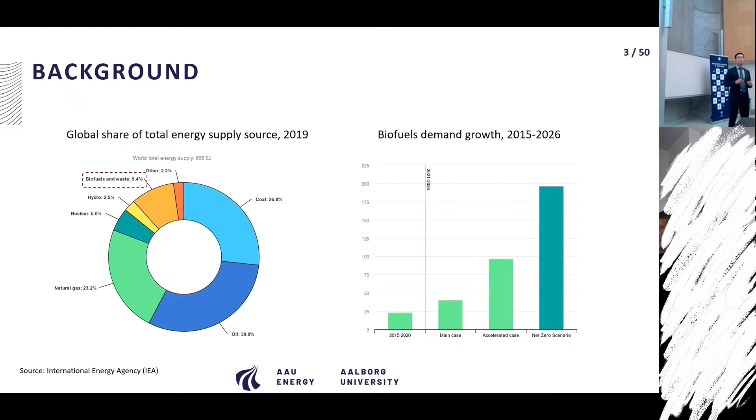From the reports of the International Energy Agency, biofuels or biomass is still the largest renewable source supply, and biofuels are very potential in the near future. So my project aims at contributing to the conversion from biomass to biofuels or bioenergy.

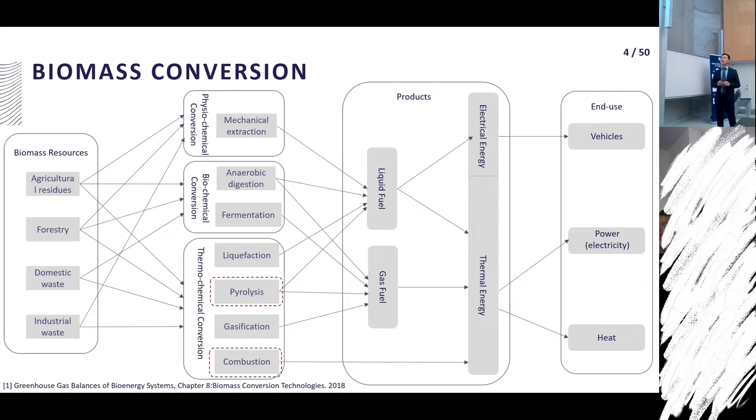From the technology point of view, biomass conversion can be roughly divided into three categories: physicochemical conversion, biochemical conversion, and thermochemical conversion. Among them, thermochemical conversion, such as pyrolysis and combustion, is usually more efficient in terms of producing biofuels and recycling energy. Moreover, pyrolysis is also a sub-process of combustion. Therefore, I intended to investigate biomass conversion via pyrolysis and combustion technologies.

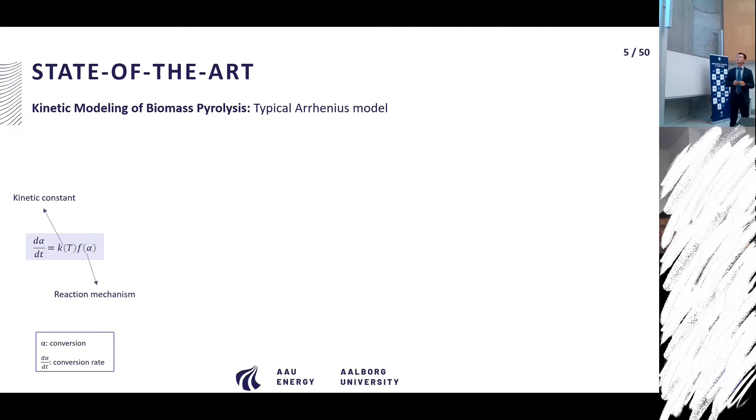For biomass pyrolysis, kinetic modeling is the fundamental basis of understanding and predicting the conversion process. The conventional models are based on the Arrhenius type equation. That is, the conversion rate, d alpha divided by dt, can be calculated by the kinetic constant K(t) times the reaction mechanism F, in which K(t) is a function of temperature governed by the kinetic parameters A and Ea.

Almost all the work in this model is derived from two sides. One is the evaluation of kinetics, and the other is the determination of the reaction mechanism. For instance, the model fitting and model free methods for the former, and the master plot for the latter. The work from the two sides also has some connections and influences each other.

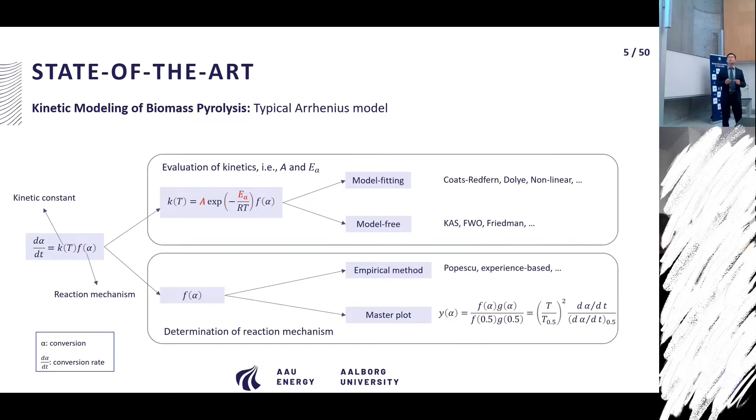In addition, the determination of the reaction mechanism, I think, is not adequate. It needs to be emphasized.

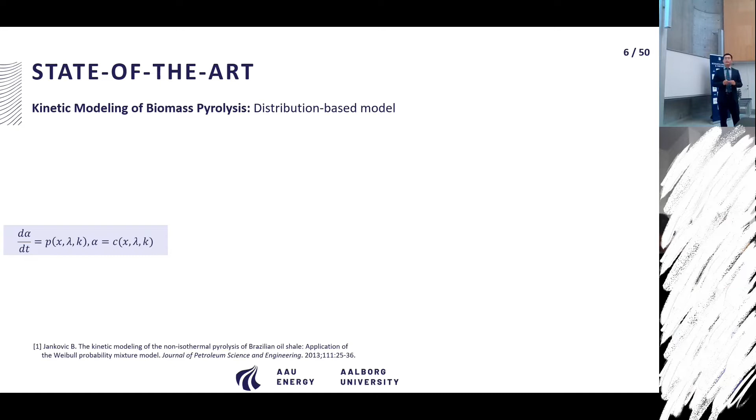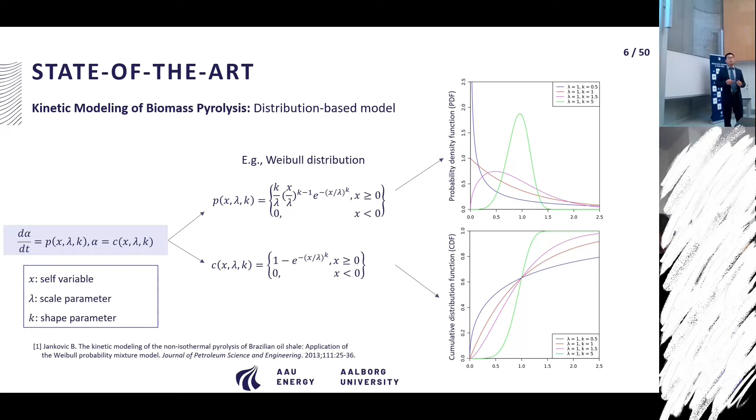Apart from the conventional model, there is a new way to describe the pyrolysis process based on some distribution functions, for instance, the Weibull distribution. From the figures, we can see the plots of the Weibull distribution, the density function and the cumulative function, are very similar to the Arrhenius equation for a certain range of lambda and k. For instance, lambda equals 1 and k equals 5 here. That shows the potential of using these distributions to predict the conversion process.

Here, I would like to talk a bit more about the conceptual ideas behind the two models. For the Arrhenius type model, it's based on collision theory, actually, and it's an analytical physics method. The reaction occurs due to the effective collision of the molecules, and how to define the effective collision is by the activation energy. For the reaction to occur, the colliding molecules must overcome the energy threshold, represented in this equation by Ea. And the pre-exponential factor A actually represents the collision frequency.

On the other hand, for the distribution-based models, it models the pyrolysis process in a statistical way, treating the overall pyrolysis process as a mass failure process. The conversion is governed by the CDF, which ranges from 0 to 1, and the conversion rate is governed by the PDF.

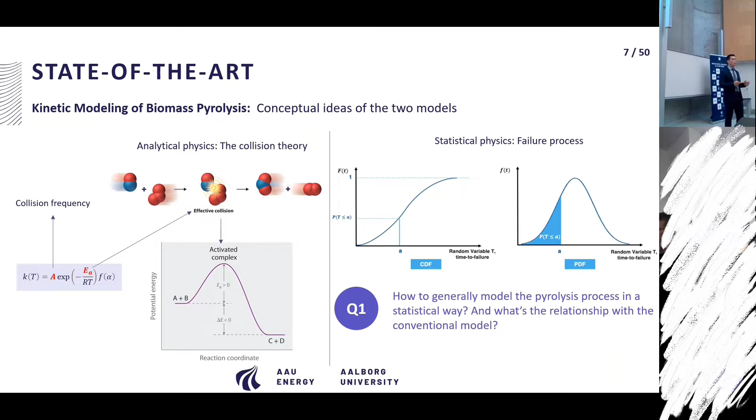If we look a bit more in depth, we can see there are actually some similarities between the two. That is, the molecular collision is random, and the happening of the effective collision is actually a statistical event. So here comes the first research question: how to generally model the pyrolysis process in a statistical way, and what the relationship is with the conventional model.

Okay, let's move to the combustion part. For biomass combustion, CFD simulation is used in my study, and a municipal solid waste, or MSW, grate boiler is selected as an investigation target. For a typical grate boiler, the feedstock is fed onto the grate and accumulates into a porous fuel bed.

The solids are heated up by the flux from the freeboard and converted to gas and ash. Consequently, the released gas from the fuel bed flows into the freeboard, where the combustibles are burned out by the secondary air supply and flow out after several heat exchangers or water paths.

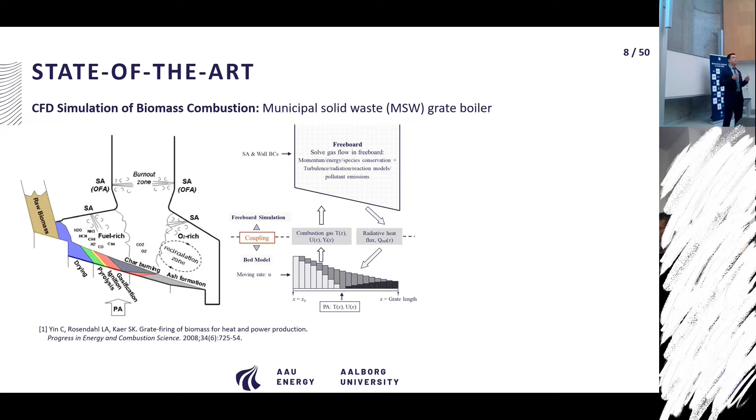In this scenario, a coupled strategy is always used for modeling such a grate boiler, namely modeling the freeboard and fuel bed separately and then coupling them together.

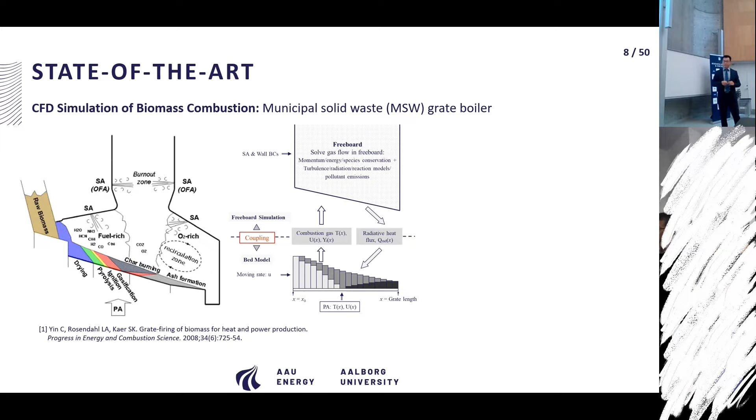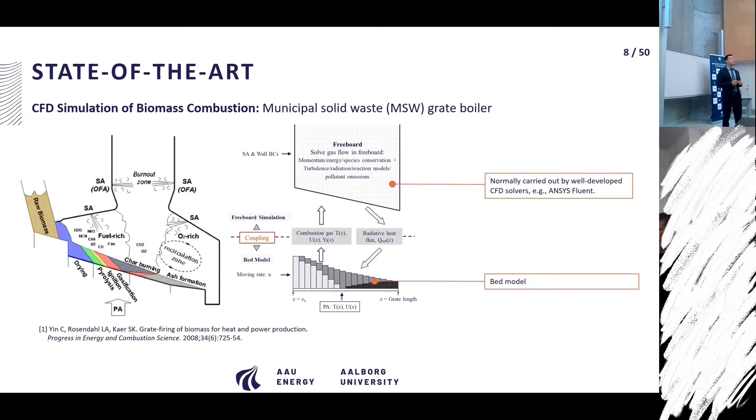Normally, the freeboard simulation is a little bit easier and can be carried out by some well-developed CFD solvers, such as ANSYS Fluent or OpenFOAM. But for the fuel bed, it's a little bit complicated. Self-development models are usually needed. So let's look a little bit deeper for the bed modeling.

According to the different modeling approaches, the bed model can be divided into three types: the empirical model, the Euler model, and Euler-Lagrange model. For the empirical model, the overall fuel bed is manually divided into several stages and only considers the overall mass and heat balance. So it's a very simple model, just to facilitate the CFD simulation in the freeboard, and it contributes very little to the fuel bed investigation.

While for the other two models, they are comprehensive models. It means they solve the governing equations and predict the overall conversion process while considering the reactions and so on. The major difference between the two models is the way of treating the solid phase. For the Euler model, it treats the solid phase as a continuous phase, while for the Euler-Lagrange model, it treats the solid phase as a discrete phase.

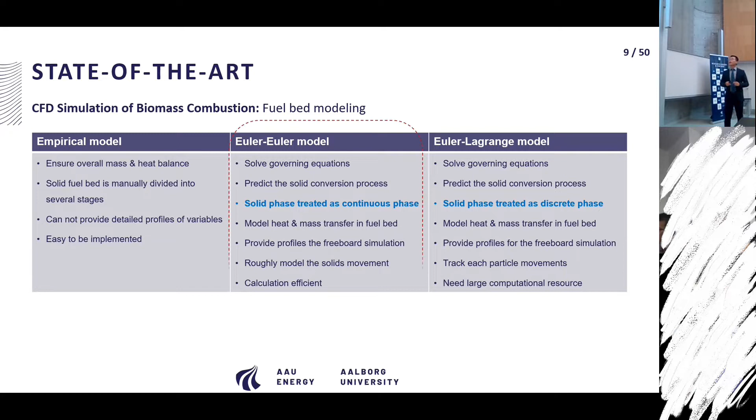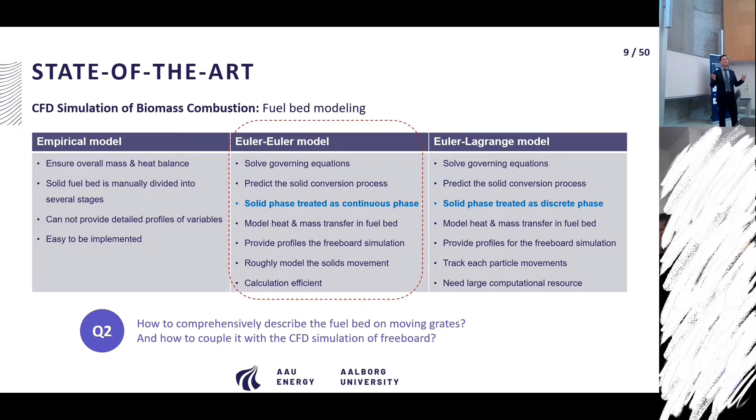So under the Lagrange framework, it allows tracking each particle's movement. However, it takes lots of computational resources, making it difficult to be implemented in a big or large industry scale boiler. So finally, I decided to develop a comprehensive bed model under the Euler framework, and then couple it with the freeboard simulation to accomplish the entire boiler simulation.

The objectives of my project are first to develop a universal description for the kinetic study of biomass pyrolysis, considering some applications and kinetic studies of woody biomass. And also second is for the biomass combustion.

I intended to simulate the entire MSW boiler, that's including the fuel bed development and the freeboard simulation, and also couple them together.

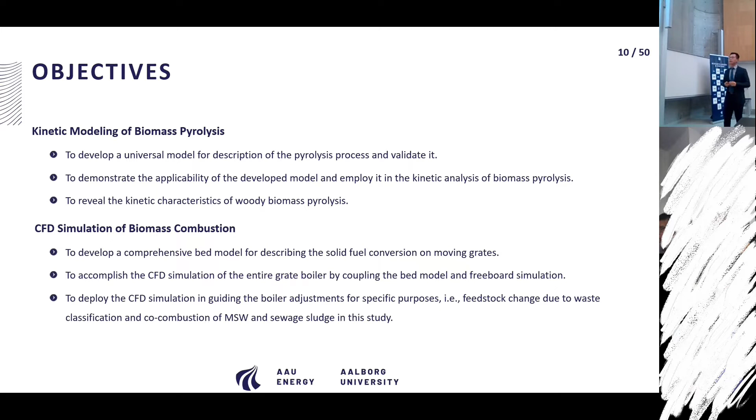So my thesis is structured into two sections: the report and the selected papers. For the report, chapter 1 is the introduction, chapter 2 is part 1, kinetic modeling of biomass pyrolysis, chapter 3 is part 2, advanced simulation of MSW combustion, and chapter 4 is the summary.

For the papers, paper A and B are derived from part 1, so they're included in chapter 2. And paper C and D are derived from part 2, so they're included in chapter 3. For paper D, it was under review when I submitted my thesis, and now it's published.

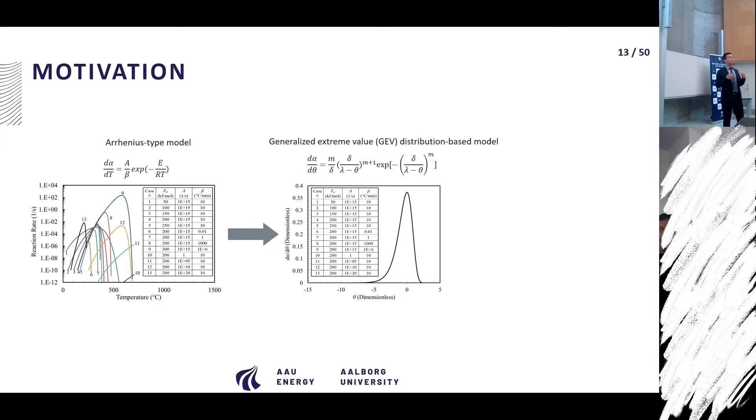Okay, let's go to part 1. The motivation for doing such a kinetic study in my project is the complexity of the current kinetics, which makes people suffer when they use them. So the idea is, should we find a general or universal modeling approach to describe the pyrolysis process? And the answer is yes, which has been tried in that paper.

It's a very good attempt, I think, showing the potential and possibility to do such universal modeling work. But it also has some limitations. For instance, it's only for first order reactions. So inspired by this paper, I decided to go further in universally modeling biomass pyrolysis.

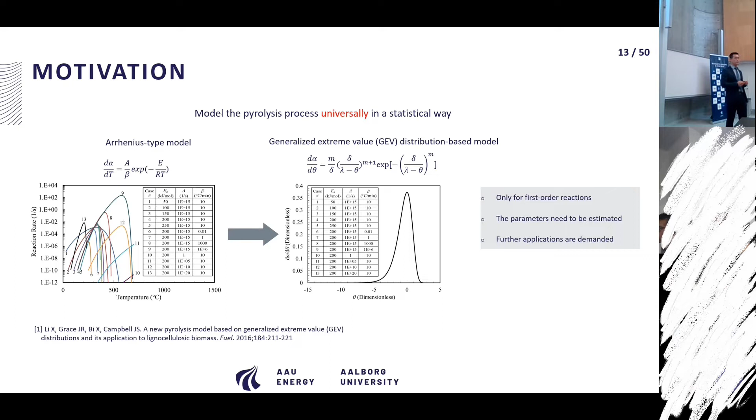Okay, first let's go to the model derivation. I know the equations are very boring, and you will not listen to me anyway, so I'll just skip this without further explanation. If you are interested, we can discuss later.

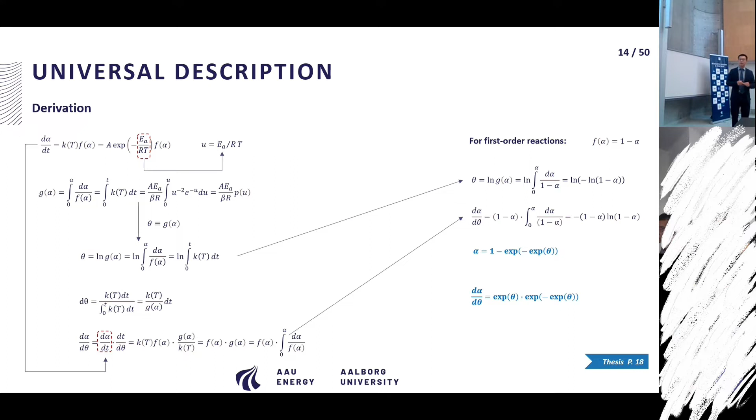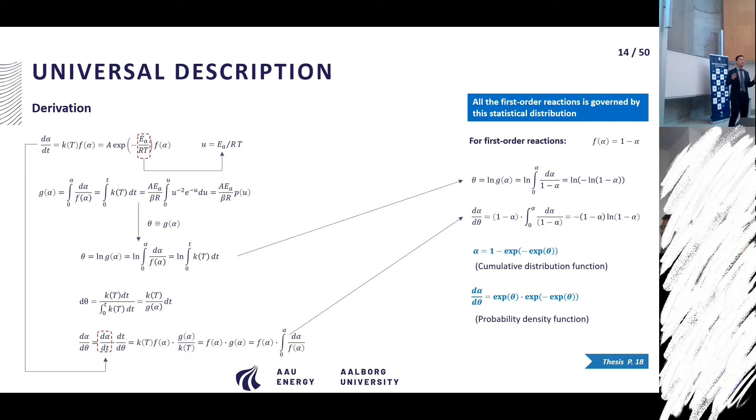Here I would like to show the final results of the universal description. For the blue equation, that indicates all first order reactions are governed by a statistical distribution, where the conversion rate is governed by the cumulative distribution function of the distribution, and the theta-based conversion rate is governed by the probability density function. For these two functions, it's only a function of the variable theta without any other parameters or variables, and moreover, it only depends on the reaction model we selected, for instance, the first order or second order.

So that's why I call it a universal description. Here I summarized all the expressions for the universal description, also with some characteristics. We can clearly see the reaction: all order reactions and the nucleation reactions belong to one category.

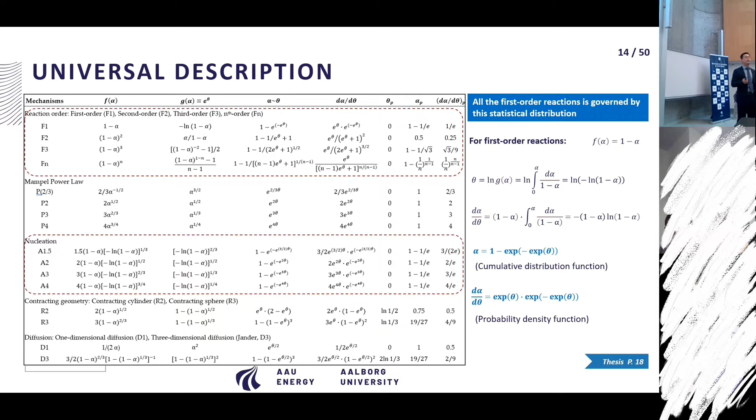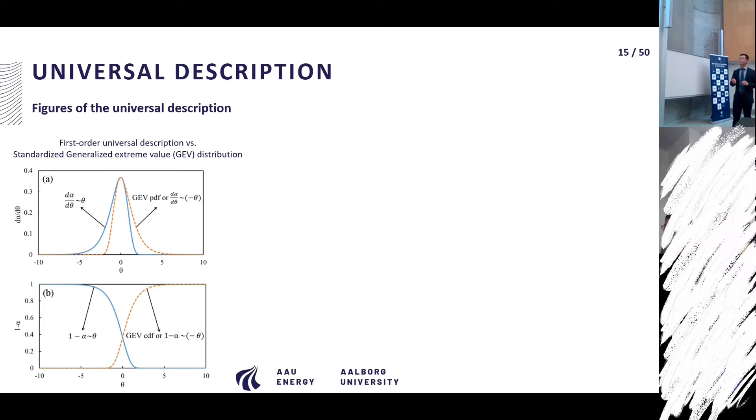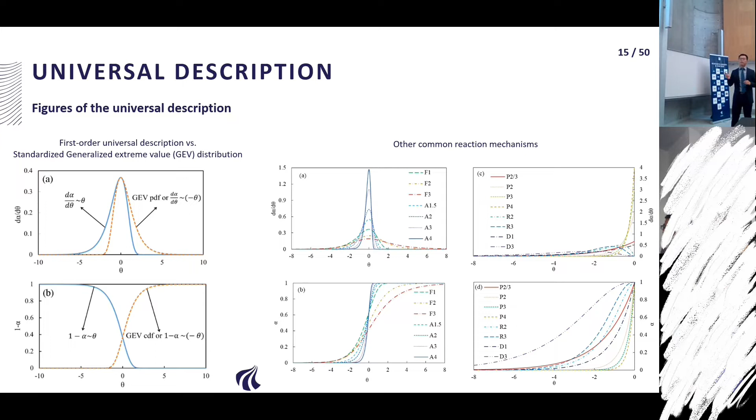Okay, here is the plot for the first order reactions, and we can see it's precisely consistent with the standardized GEV distribution. I think that figure explains why the GEV distribution can be used to analyze the biomass pyrolysis process, which has been conducted in lots of studies. Also for the plots of other common reaction mechanisms, they have the same peak position theta value, and these unique characteristics can be used to analyze the biomass pyrolysis process, which will be discussed later.

Okay, it's time to call back to the inspiration paper. I mentioned before that this kinetic modeling work was inspired by a paper, and here is the model actually used in that paper. It looks different from the universal description I derived. I reproduced this model, and the finding is the larger lambda is, the better the fitness to the Arrhenius model.

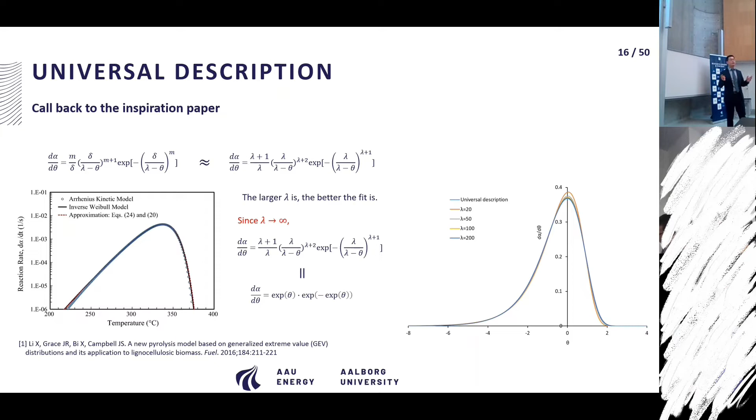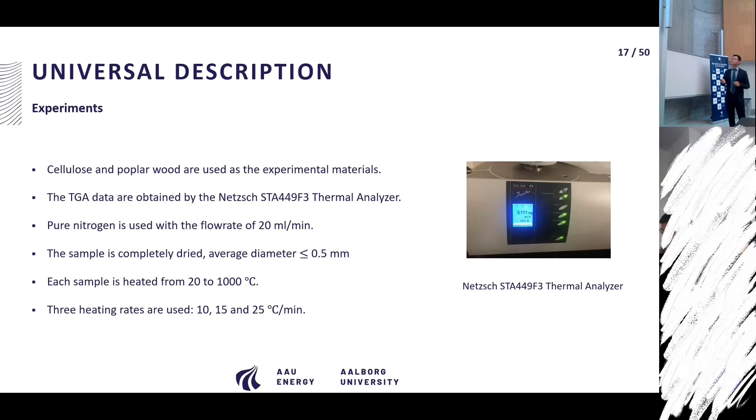Before demonstrating the model applications, I would like to briefly introduce the experiment setups. Cellulose and poplar wood are analyzed by a thermal analyzer to obtain the TGA data. Cellulose, as one of the major components of biomass, the data will be the pseudo components, and will be used for model validation. Poplar wood, as one of the real biomass, the TGA data will be used to demonstrate the model's applicability. So let's move on.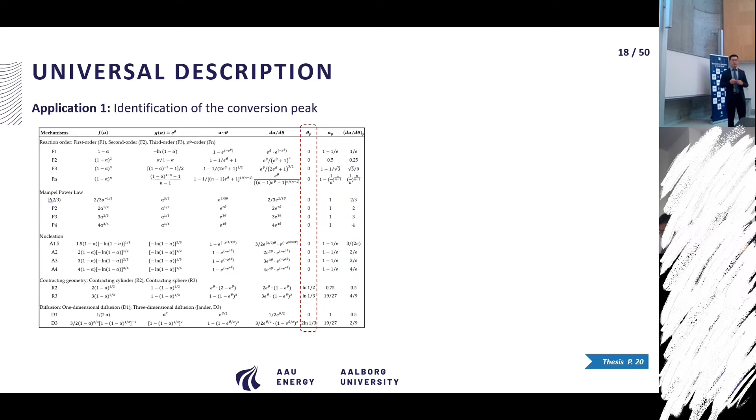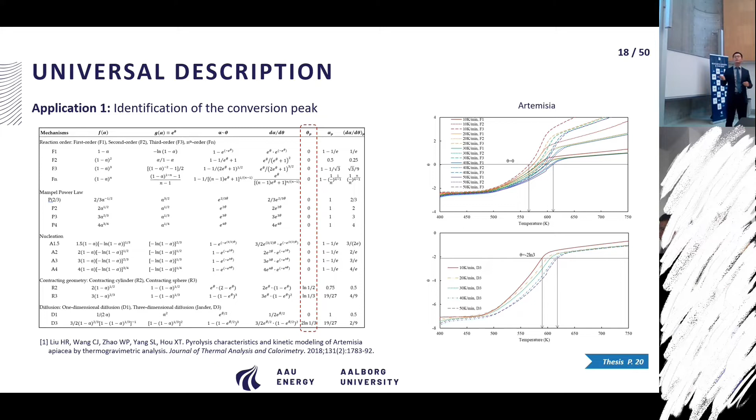Application 1 is to identify the conversion peak. From this table, we can see at the conversion peak, the theta value is fixed, and this theta is a self-defined variable. If we plot theta versus temperature, then if we know the reaction mechanism, we can easily identify the peak position. So that's a simple one.

Application 2 is a simplified kinetic model, used to predict the conversion rate. As we derived in previous slides, the theta-based conversion rate is derived. If we substitute F alpha and G alpha into this equation, we can clarify the relationship between the theta-based conversion rate and temperature-based conversion rate.

That's important. In the introduction, I raised the first research question: how to universally describe the kinetic process in a statistical way, and what's the relationship between it and the conventional model. This equation, I think, clearly answers that question. So that's the equation between the universal description and the conventional kinetic model.

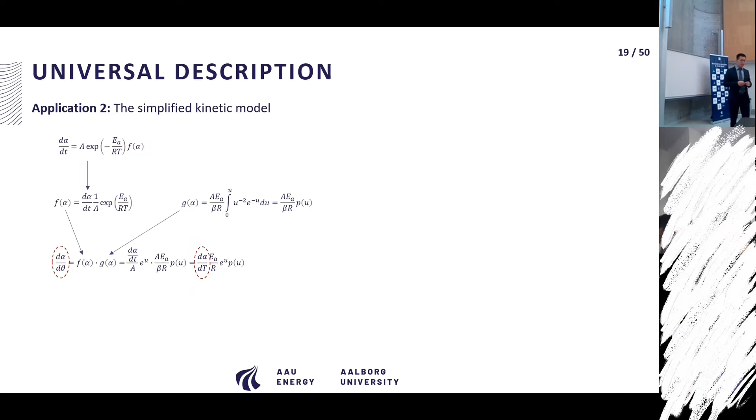But this equation is not simplified anymore, because P(u) here is a temperature integral which has no analytical solution. So I introduced an approximate equation for P(u), which is also used in the KAS method. Then we can get a much simpler equation as described here. If we separate d alpha/dt to the left side, we get another expression for how to calculate the conversion rate, other than the typical Arrhenius equation.

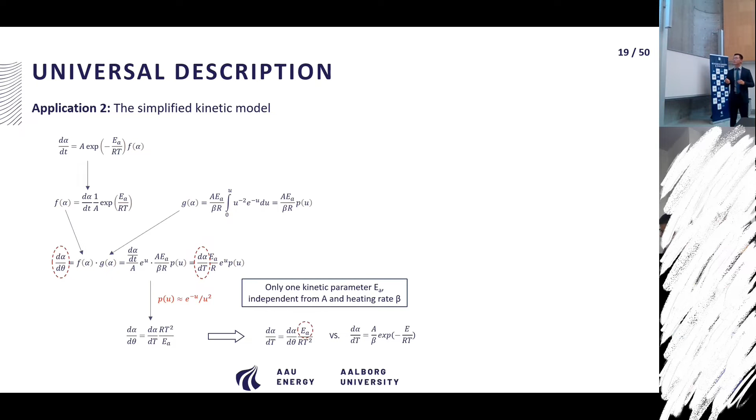Comparing with the typical Arrhenius equation, we can see the new equation only contains one kinetic parameter, EA, because d alpha/d theta is a certainty if the reaction mechanism is certain, and it's independent from A and heating rate. Okay, let's see the comparison results.

From these results, we can conclude that for the order reaction mechanisms and R2, R3, and D3, the difference is minor. But for the nucleation reactions, the differences are remarkable. I suppose this is probably due to the approximate equation for P(u) used, which may not be that suitable for nucleation reactions.

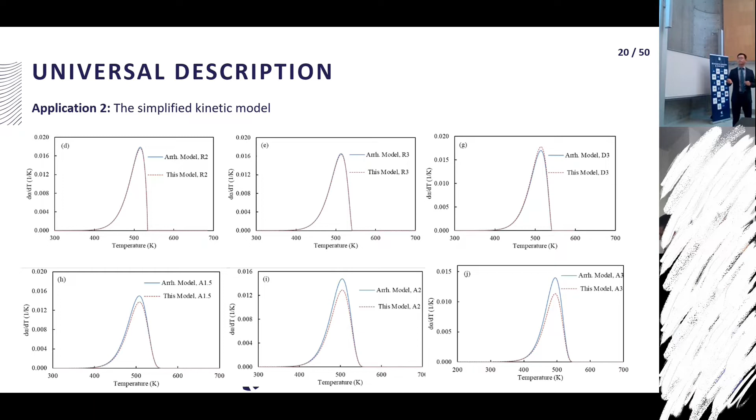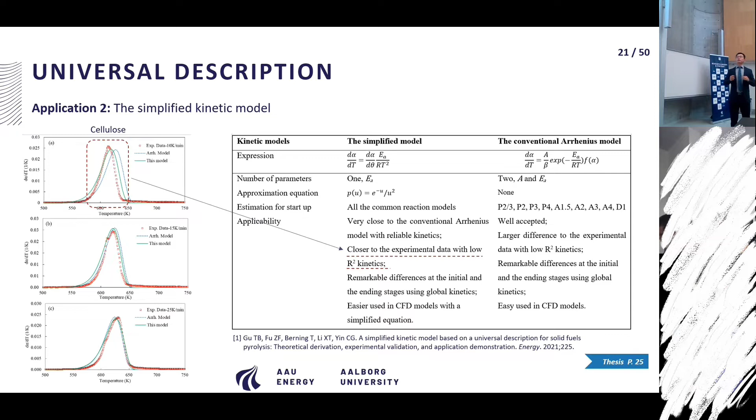Moreover, I did an experimental validation using the cellulose TGA data. For these three figures, both the conventional Arrhenius model and the simplified kinetic model show good agreement with the experimental data. But for this figure, using low quality kinetics, the simplified model performs better than the conventional one. I think this is because there is only one kinetic parameter in the simplified model, so using low quality kinetics introduces less calculation error.

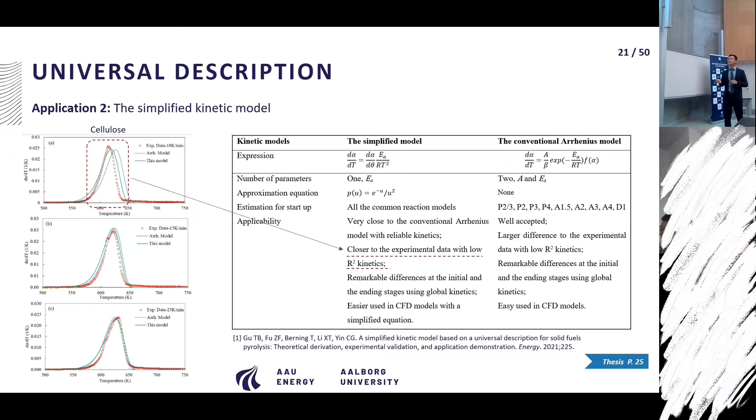Besides these two, there are two more applications. The third is determination of the reaction mechanism, and the fourth is evaluation of kinetics. But these two are based on the same equation as the simplified model in application 2, so I will not go further here, just briefly show some results. If you would like to know more details, you can refer to my thesis.

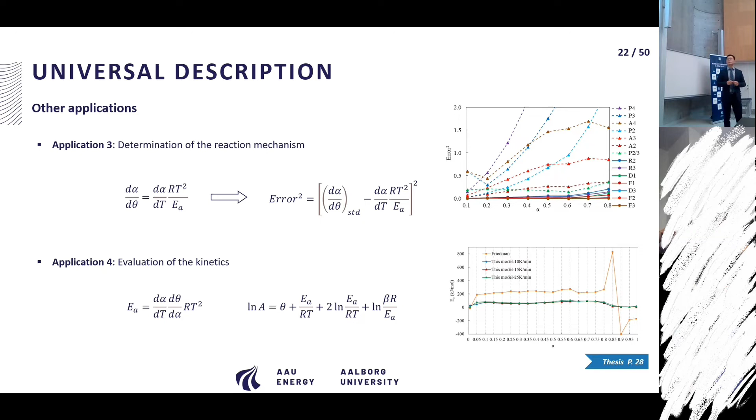Okay, let's summarize part 1. A universal description for solid fuel pyrolysis is derived for all the commonly used reaction mechanisms, and then the unique characteristics are reviewed for the universal descriptions. Then 4 applications have been conducted based on the universal description, including the simplified kinetic model.

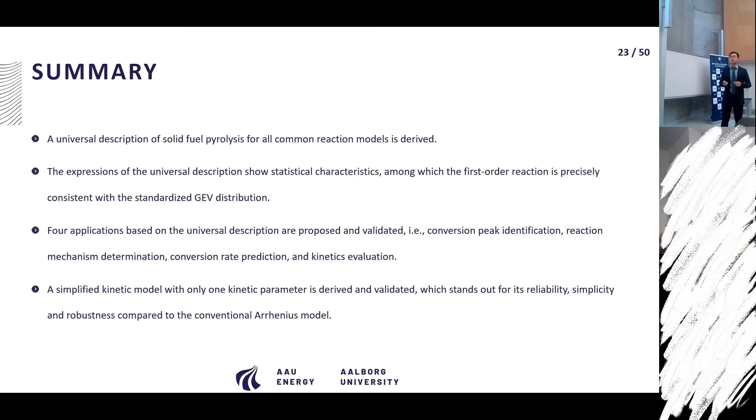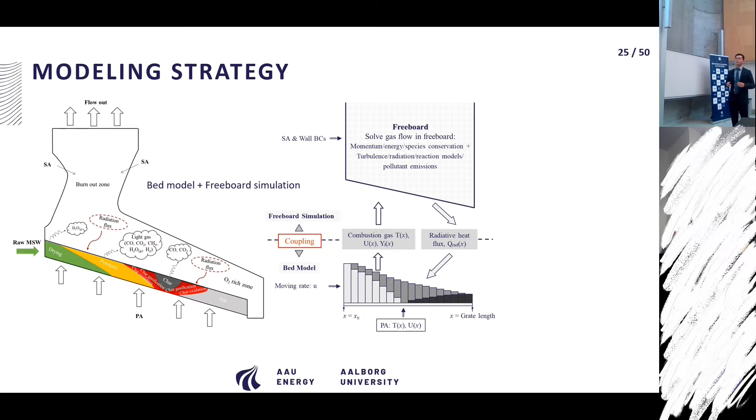Okay, let's move to part 2, CFD simulation of biomass combustion. As mentioned before, the coupled strategy is used for the CFD simulation of the boiler. The freeboard simulation is carried out by ANSYS Fluent in my thesis, and the fuel bed is described by a standalone bed model, which is developed by myself. I couple them together manually.

The fuel bed model was first developed for a fixed bed combustor during my master's study. In my PhD project, it was transformed for a moving grate bed model. I wouldn't say my bed model is a brand new one, but it has some improvements, for instance more appropriate boundary conditions and more comprehensive reactions used in that model. Let me show you the transformation process.

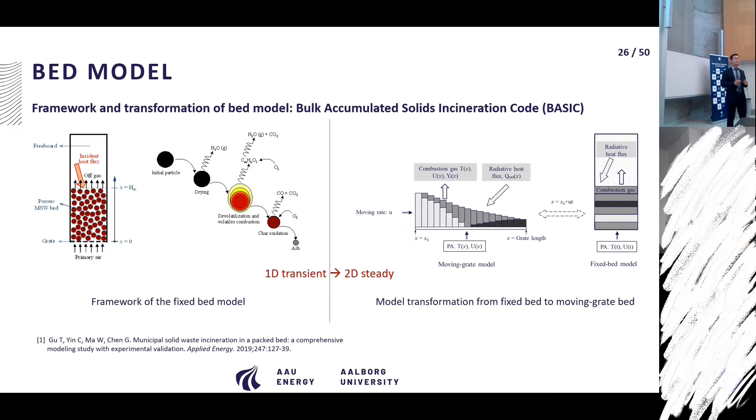The moving grate bed model results were mapped from the fixed bed model results over time. The results along the grate length are mapped from the results over combustion time. So in this way, the 1D transient fixed bed model is transformed into a 2D steady moving grate model. That's the idea.

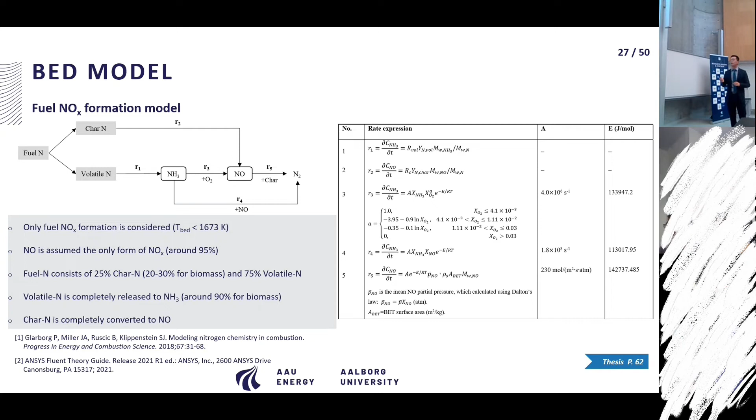Besides the transformation, NOx formation is extended in the latest bed model, but it's only for fuel NOx, because the temperature inside the fuel bed model is relatively low — not intense enough for thermal NOx reactions to occur. Also, nitric oxide is assumed to be the only form of NOx in the bed model, because it's indeed the majority one. The kinetics for the NOx formation refer to the ANSYS Fluent theory guide.

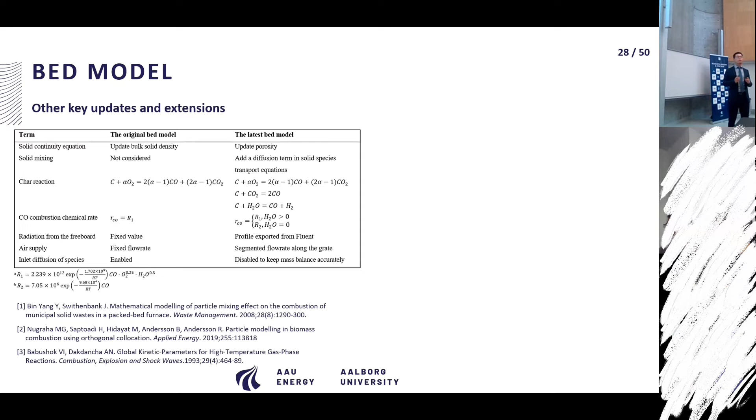Apart from the NOx modeling, there are also some other key updates in my bed model, for instance the solid mixing due to grate movement, since it's now a moving grate bed model, and also the char gasification reactions and the segmented air supply, because the grate doesn't have a fixed airflow — it's a distributed airflow, and so on.

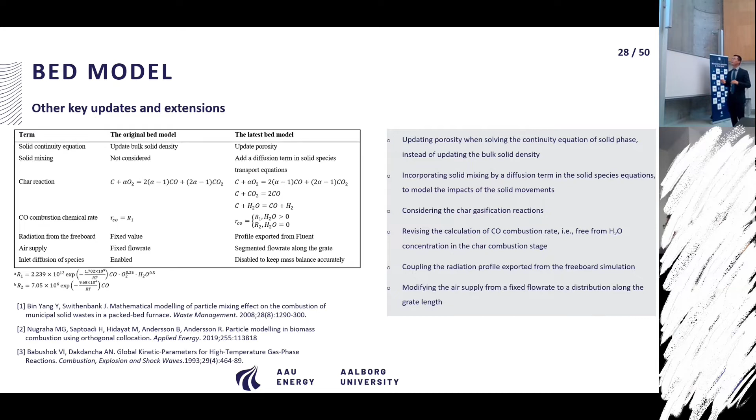Here's a brief summary of the latest bed model, including the boundary conditions and the governing equations for both solid and gas phases. For boundary conditions, at the top surface there is mass and heat transfer with the freeboard.

16 reactions are included in total in my bed model, including 5 reactions for the fuel NOx formation. I would say it's still a global reaction mechanism for the NOx.

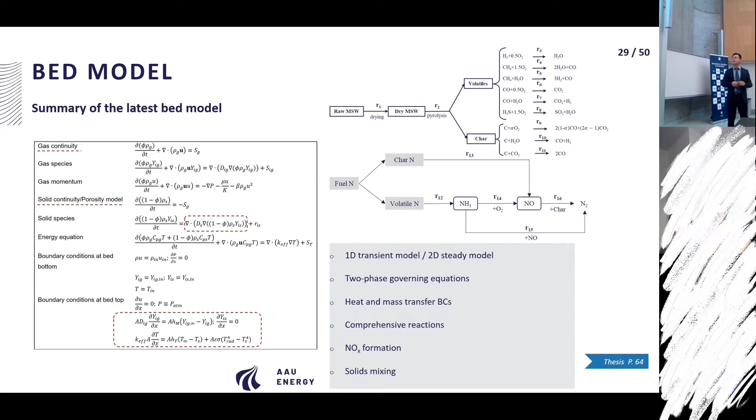The fuel bed model is solved through discretization. I use the implicit scheme and the central differencing scheme to describe the equations, and the model is coded in MATLAB based on a SIMPLE algorithm.

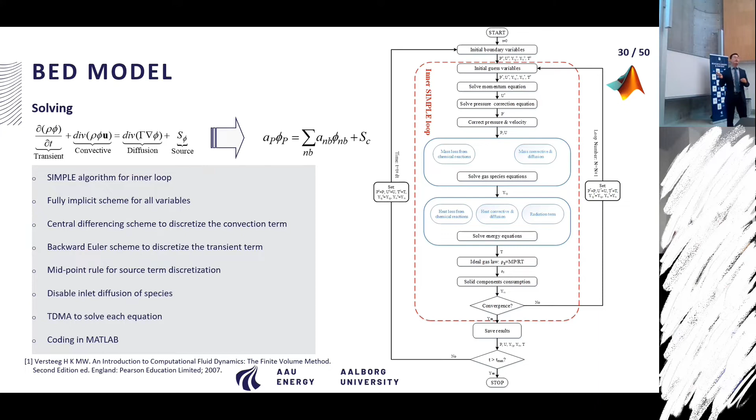Let's go to the freeboard simulation. It's called the overbed boiler — an in-operation industrial-scale moving grate boiler with an internal rating of 750 tons MSW per day. The grate consists of 5 individual grates, each with its own air supply system, which is why the primary air supply is not a fixed flow rate but a distribution across five parts. There are also 3 temperature measurement points at different positions inside the boiler, and that data can be used for model validation.

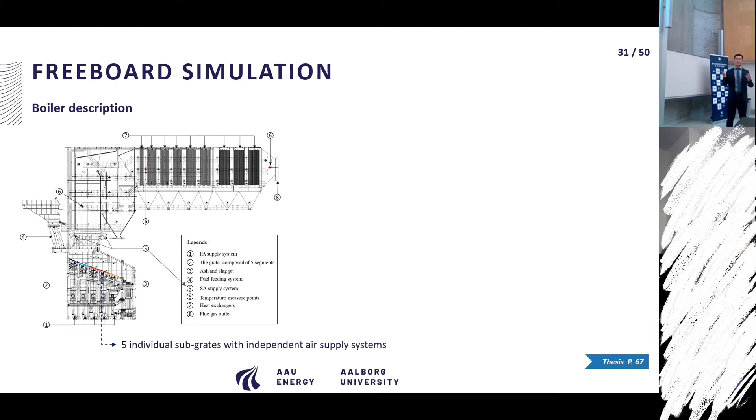The 3D geometry was created in ANSYS SpaceClaim, which will be used for meshing. The mesh is created as a hexahedral structured mesh using ANSYS ICEM, with a total cell count of more than 16 million, and the quality in terms of skewness, angle, and ratio is considered good.

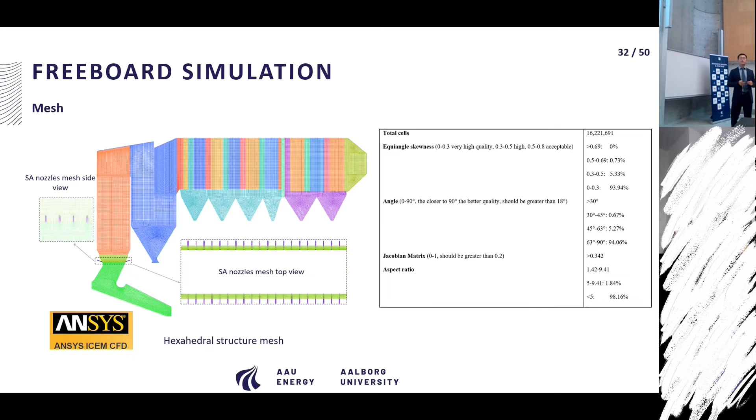ANSYS Fluent is selected as the solver, using the default setups in Fluent except for, for instance, the k-epsilon turbulence model and the reactions. There are 2 UDFs compiled in the Fluent simulation: one is the inlet profile carrying the bed modeling results, and the other is for the P1 radiation model, which models the mixture gas radiative properties. It's called the refined WSGGM, which was proven to perform better than the default WSGGM.

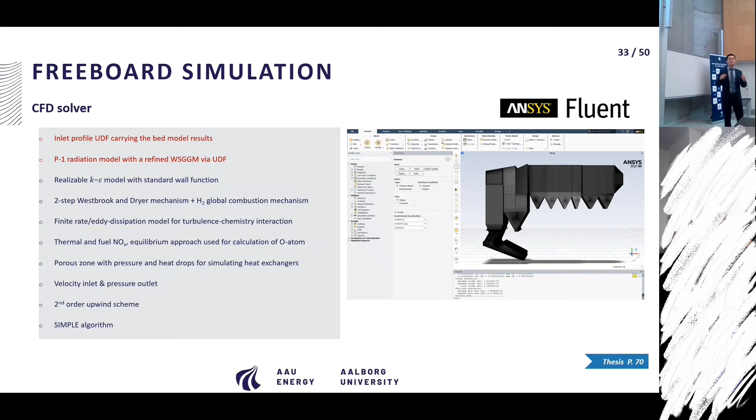Okay, the above slide showed all the descriptions of the simulation, and next I'm going to show you the model validation. For the model validation, first for the bed model.

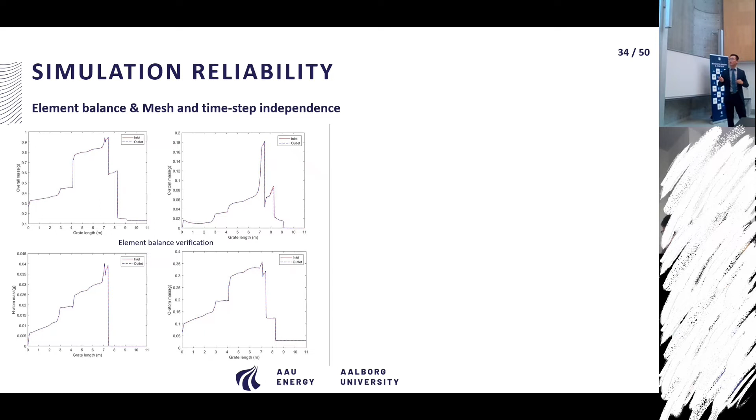Since the bed model is self-developed, it's essential to check the mass and element balance. So I plotted the overall mass flow and the major elements, carbon, hydrogen, and oxygen atoms, the mass flow at the bed inlet and at the bed outlet, and we can see the results have no big difference.

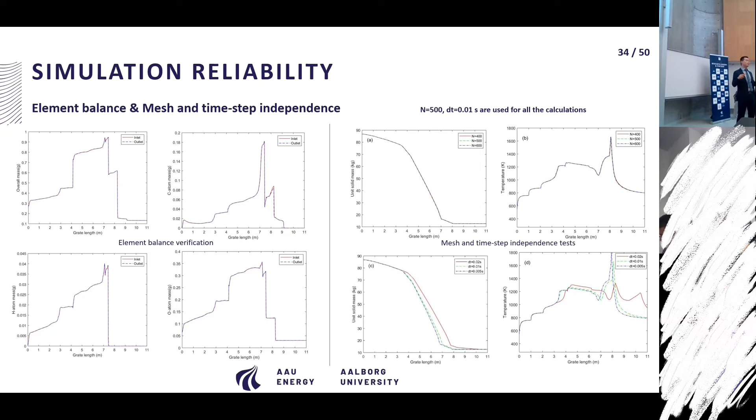There is also a mesh and time step independence test. The bed model is somehow a 2D study, but it's mapped from the 1D trending model, so it's necessary to check not only the mesh independence but also the time step. For mesh independence, testing numbers from 400 to 600, the key results show no big impact. For the time step, it affects a lot - from 0.02 second to 0.005 second, the results are quite different. Considering computational cost, I decided to use a mesh number of 500 and time step of 0.01 second in my bed model for all the simulations.

Okay, then coupling convergence. As mentioned before, the bed model is coded in MATLAB, but the freeboard simulation is carried out in ANSYS Fluent, so the coupling procedure is done manually. First I run the bed model with a guessed radiation temperature and get the results. Then I integrate the bed model results via UDF into ANSYS Fluent and obtain the Fluent results. Meanwhile, I export the radiation temperature from Fluent and rerun the bed model using the real radiation temperature exported from Fluent, getting new updated bed model results, then run Fluent again with the new bed model results.

In this iteration, I compare the heat flux transfer rate at the interaction surface of the freeboard and the fuel bed. If there's no significant difference between the two transfer rates, then convergence is achieved. If not, the coupling procedure runs again until there's no big difference. From these results, after 3 times of coupling, convergence is achieved. All the CFD simulation results in my thesis are after 3 or 4 times of coupling in this procedure.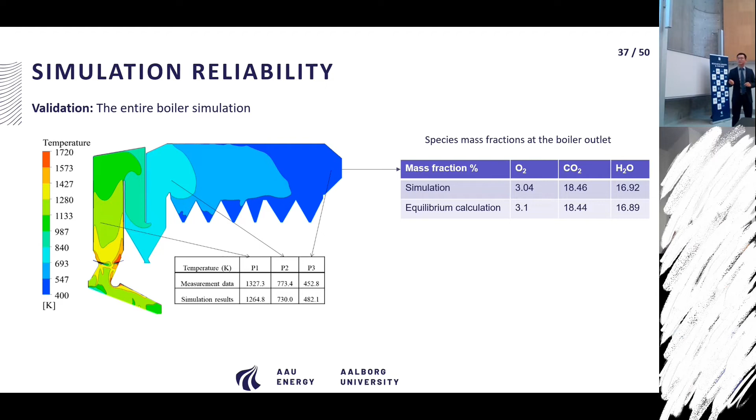So far, I would say the simulation I developed is trustable. I know for modeling, it's very hard to convince everyone that your model is good, so I did lots of work on this. To save time, I won't show too many more results, instead I'll show the big picture.

So after the model validation, I did 2 simulation-based studies. The first one is to investigate the impacts of feedstock change due to waste classification. Feedstock 1 is the current feedstock, or current MSW, that is being incinerated now. Feedstock 2 is a new MSW due to the waste classification. We can see the fuel quality is actually improved after classification, because the moisture content is decreased and the heating value is increased.

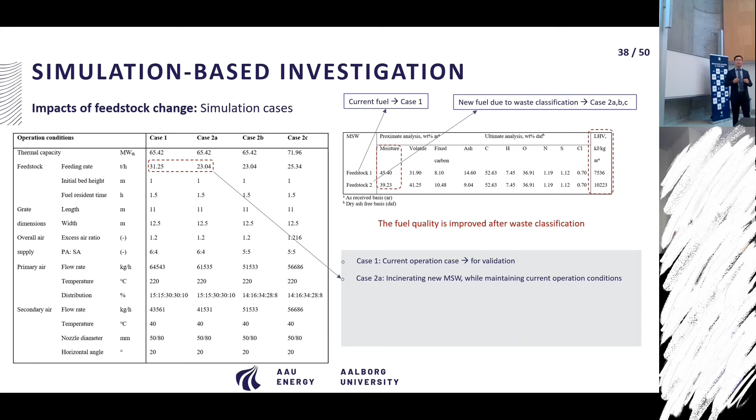So I ran 4 cases to compare them. Case 1 is the current operating case, just for validation, and case 2A is incinerating the new MSW while maintaining the operation conditions as in case 1.

Case 2B is incinerating the new MSW, but I made some adjustments based on the results of case 2A. For instance, increasing the secondary air supply means adjusting the PA to SA ratio, and also the PA distributions to increase mixing in the freeboard and better utilization of the primary air supply. Case 2C is the same as case 2B, but expands the thermal input by 10%.

Because after the classification, fuel quality is increased. If we maintain the same thermal input as the boiler design, the disposal ability will be decreased.

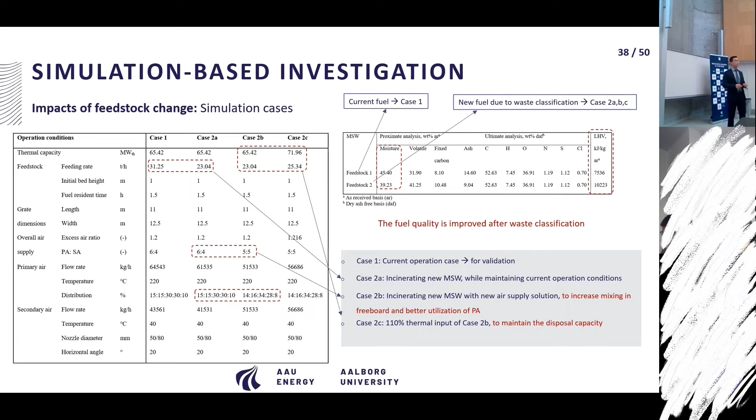That's why I expect a 10% increase. Briefly, some key results of case 2A and case 2B: the upper figures are for case 2A and the lower figures are for case 2B. This is the bed modeling results.

The combustion trend from the simulation results are very similar, and we can see the conversion process can be divided into 4 stages. Stage 1 corresponds to the moisture evaporation dominant stage, stage 2 is the steady combustion stage, stage 3 is the char reaction stage, and the last stage is the cooling stage.

Also, the velocities, temperatures, oxygen and combustibles are all in the expected range. There are also some differences I would like to highlight.

First, at the char reaction stage, we can see that after the air supply adjustment, the char reaction stage is prolonged. Also, the highest temperature in case 2B is lower than in case 2A, which benefits the grate service life.

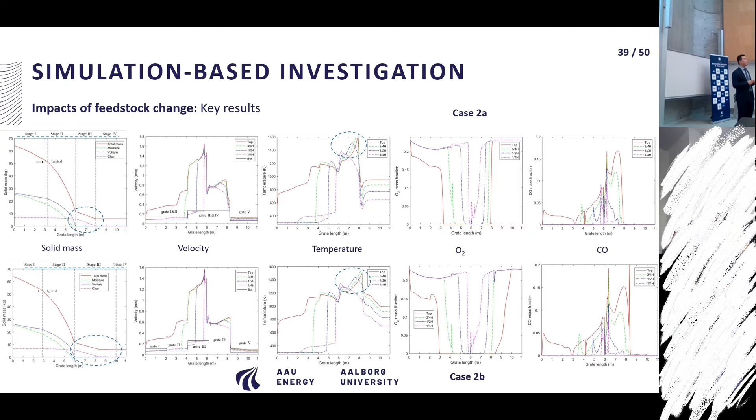Looking at the colorful figures, the temperature and all other variables are also in a reasonable range. For the oxygen-rich zone, that's a common issue for grate boilers, especially for MSW. The oxygen-rich zone for case 2B is decreased a lot, due to the change in distribution of the PA.

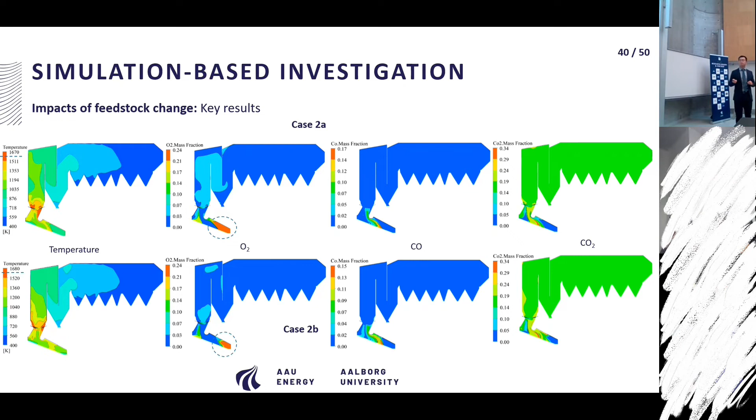Beside the colorful figures, I also did a quantitative analysis of the fluid flow - that is, the uniformity of the velocity and the turbulence, which indicates the mixing of the flow. In general, we expect to increase the mixing and uniformity together, but sometimes we just can't get what we want. That's life.

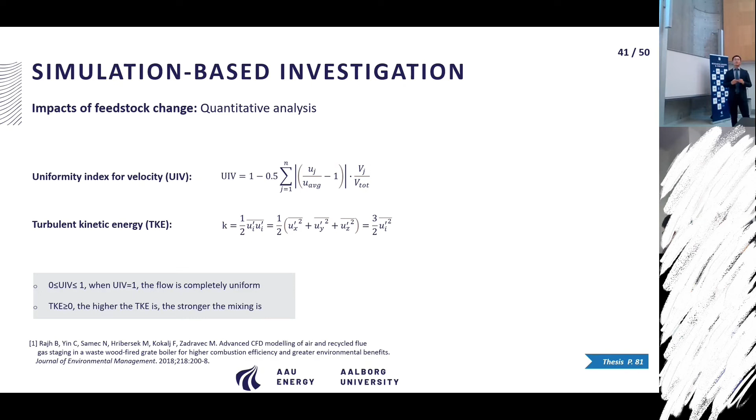Let me show the results. The mixing is increased by the enhancement of the secondary supply, which also means in local areas - in SA nozzles - the velocity is increased a lot compared to other areas. So it's not good for the overall uniformity.

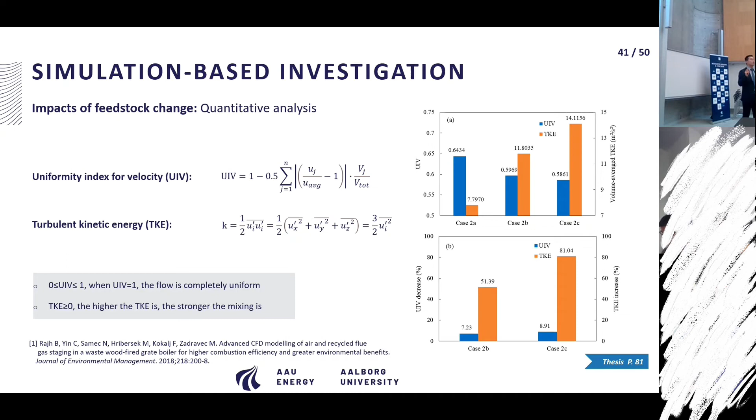The results are also based on my expectation: the mixing is increased a lot, while with a small sacrifice of the uniformity.

The second simulation-based study is a co-combustion of MSW and sludge with industrial solid waste, where the industrial solid waste acts as a supporting fuel because it has high heating value, while for the MSW and the sludge, the heating value is very low.

8 cases are conducted by the simulation with 4 different blends and different ratios of MSW from 50 to 80%. I still set the MSW as the dominant fuel just to keep the boiler's stability, because this boiler is designed for MSW incineration.

I also equalize the heating value of the blend to the original MSW, to maintain the disposal ability of the boiler. That also means the fuel NOx content is different for the 4 kinds of blends.

Also, 2 solutions for the primary air supply have been tested. The first solution is the currently used solution, and the second one is after adjustment based on the purpose for denitrification, DNOx.

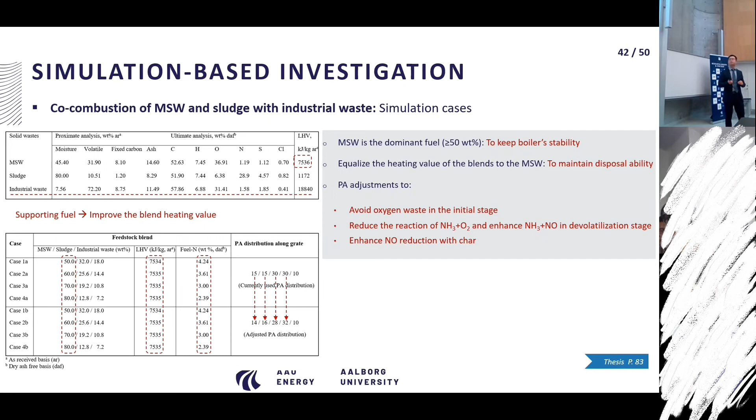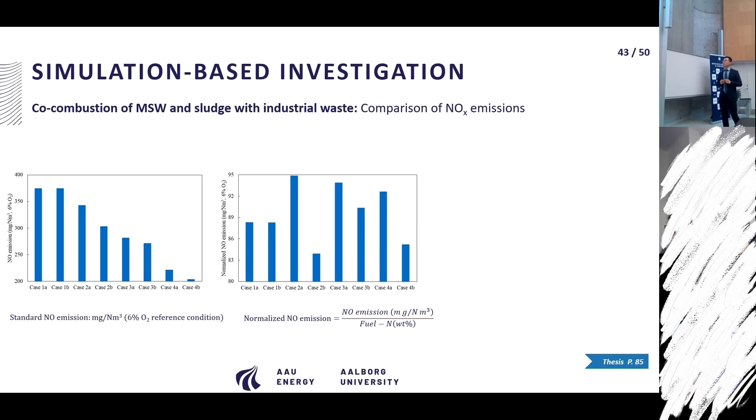Okay, let me show you the results. Compared to the 8 cases, the NOx emission at the boiler outlet is decreased significantly. This is for the standard NOx emission, but that's also due to the different fuel nitrogen content in the different blends. So to eliminate this effect, I calculated a normalized NOx emission, divided by the fuel nitrogen content in the fuel incinerator.

So from this figure, I picked out case 2B as the best case in terms of the NOx emission.

Afterwards, I did a calculation for NOx reduction by the air supply adjustment, because there are two kinds of solutions of primary air supply, and for case A to case B, that's the only difference. For example, case 1A to 1B, 2A to 2B. So I calculated the effectiveness for the NOx reduction by the air supply, which we can see is effective, and the NOx reduction is up to 11.54%.

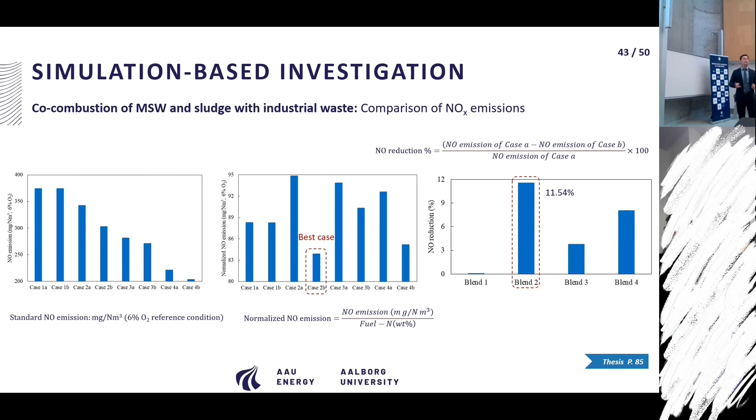Okay, finally, let's summarize part 2. First, an in-house bed model is updated and transformed to a moving grate bed model, including NOx formation. Then the entire large-scale grate boiler is simulated by this model, coupled with ANSYS Fluent. The bed model and the entire simulation were both validated from several perspectives.

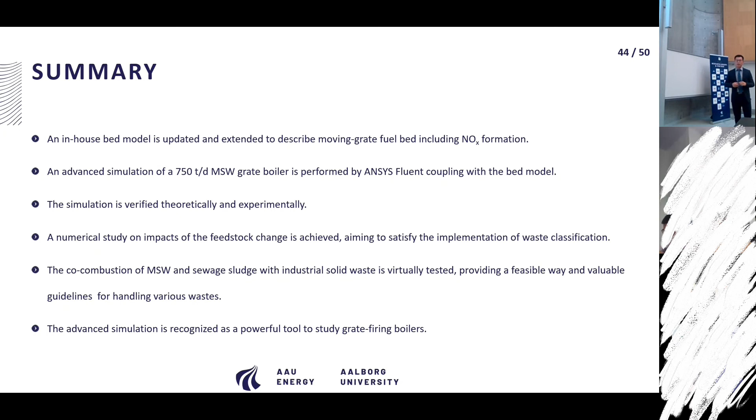Then two numerical studies based on the simulation are conducted: one for investigation of the waste physical change due to waste classification, and another for MSW co-firing with sludge.

Okay, let's go to the next section. The main work and contribution from my project is the two models. The first is for the kinetic study. It is a universal description, other than first order, for all the commonly used reaction mechanisms. The unique characteristics of this universal description have been analyzed, which has been used to study the biomass pyrolysis process, and also to construct a simplified kinetic model with only one kinetics, which has also been validated.

For the CFD simulation part, an in-house bed model is developed for the moving grate fuel bed, including NOx, and the entire simulation is accomplished by coupling the bed model with ANSYS Fluent simulation. Also, two numerical studies have been conducted aiming to investigate the feedstock change due to waste classification, and also the co-firing of sludge with industrial solid waste. I think that's important to the plant, because in the future they may use these two solutions to retrofit or adjust their boilers.

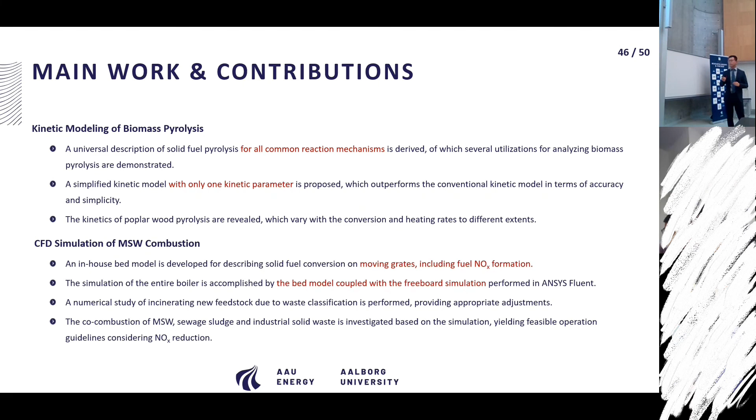Okay, even though I spent a lot of effort on the two models in my project, I have to admit there are some drawbacks in my work. First, for the kinetic modeling, the universal description should be extended to multi-step reaction mechanisms. So far it's only for the global reaction mechanism, and maybe it could even be combined with species evolution pathway models to extend the applicability. Moreover, various different biomass feedstocks need to be analyzed by the new kinetic model to get more reliable kinetics.

For the combustion part, first, there are some improvements needed for the bed model. A complex submodel for describing particle movements or motions needs to be integrated into the bed model. Also, the lateral heat transfer and the thermal impacts of the grate need to be considered when transforming the fixed bed model to the moving grate bed model. And the bed model deserves to be upgraded from thermally thin to thermally thick, but here we may need a reasonable compromise between that and the computational cost.